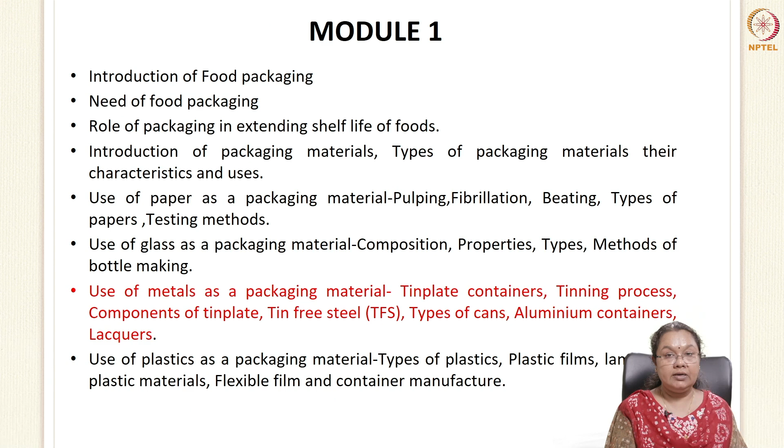Under this, we'll be discussing about tin plate containers, the tinning process, and the different components of tin plate, then tin-free steel, aluminum containers, different types of cans, and lacquers.

Coming to metal packages, these are very robust and durable. Because of this, they are used for canning and to store canned products, dairy products, drinks, and non-canned food products. They are used to develop metal closures, metallized films, laminates, and even in non-food products like paints, varnishes, lubricants, cosmetics, and other biological products and medicines.

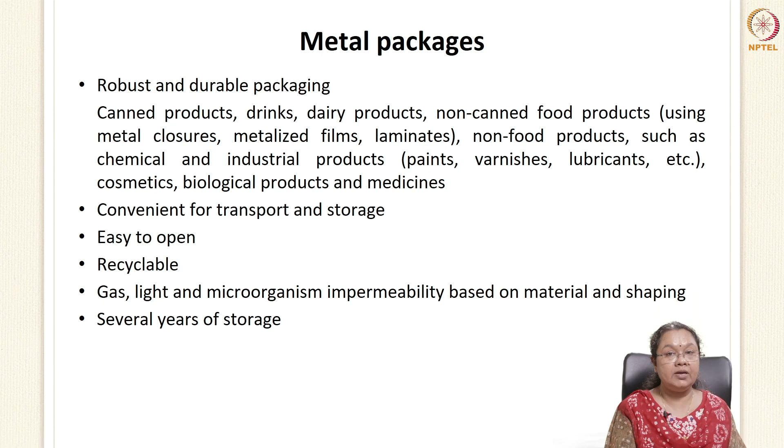The reason why we use metals as a packaging material is because it's easy to open, it is recyclable, it can be recycled and reused, it's convenient to transport and store, and it can be stored for a very long time. It has a very long storage life and is impermeable to gas, light, and microorganisms. But these parameters depend upon the kind of material used and the shape of the material.

We have tin plate, which is the older packaging material, and this can be in the form of round, square, or rectangular. The first tin cans were patented by Peter Durand in 1810, based on the experiments of Nicolas Appert, who developed the process of sterilization, later called appertization. Today also we follow the same term, sterilization or appertization. So the name was given based on the name of the scientist.

Tins are light in nature. Even from the consumer point of view, it is easy to handle and carry. It is much lighter, and it reduces carbon dioxide emission during transportation, so this is environmentally friendly also.

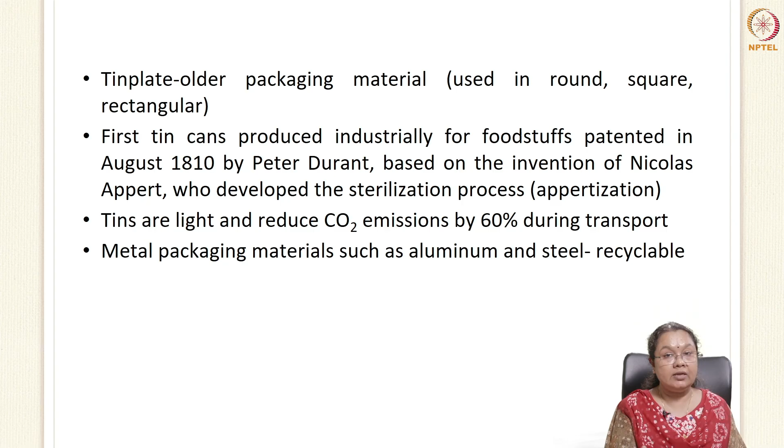Metal packaging materials generally contain aluminum and steel, and these are recyclable and reusable. Once it has been opened, it can be reused for other purposes also, not necessarily for storing food - it can be used for storing other things.

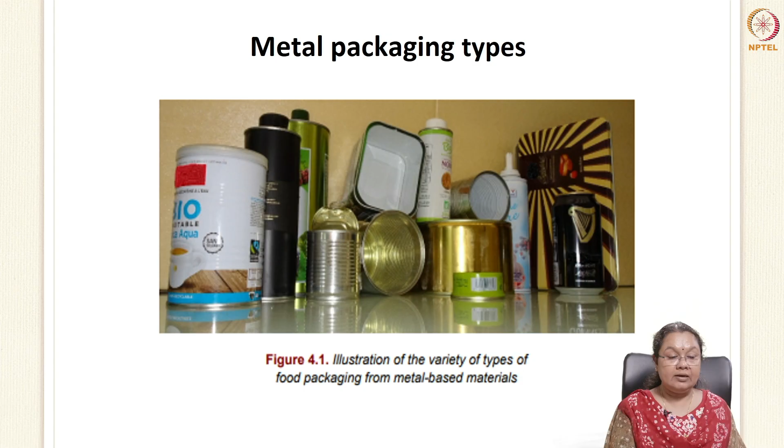In this picture you can see a variety of packaging materials shown here, and all these packaging materials are metal containers, and they can be cylindrical, rectangular. We also have boxes here.

Metal cans, mainly used in the food industry, are of two types: 2-piece can and 3-piece can. This generally contains one body, that is the cylinder part, and it may have one or two lids depending upon the type of can. If it is a 2-piece can, it will have one lid, and if it is a 3-piece can, then it will have two ends, that is one lid and the other bottom part.

These lids are seamed to the can, and inside this the contents are stored. Generally, because of the sturdy nature of the can, it doesn't need a secondary packaging. The number of secondary or tertiary packages can be brought down.

We also have beverage cans, which are lightweight. Though they are lightweight, they are unbreakable. They can resist the impact during transportation, they are puncture resistant, they can withstand very high temperature and pressure, and they are good barriers to light, gas, and oxygen. Mostly the cans used for packing beverages are 2-piece cans.

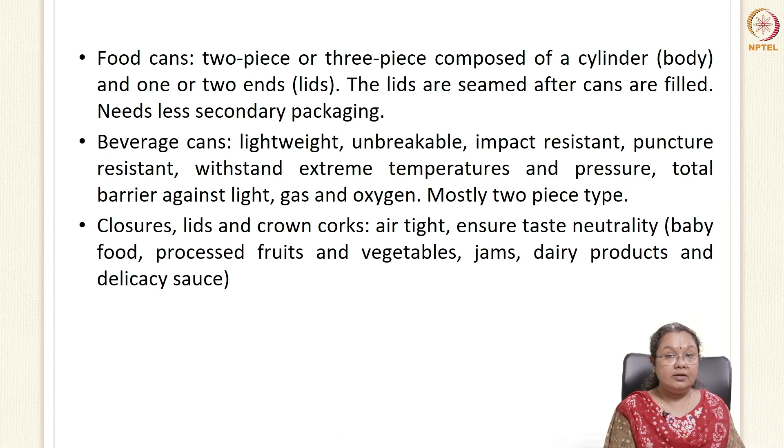The metals can also be used for developing closures, lids, crown corks. This helps in keeping the contents airtight, and also ensures neutral taste, which is very much important in baby foods or infant foods, processed fruits and vegetables, jams, dairy products, and other delicacies like sauces. So the contents from the tin or the container or the lid should not leach into the contents inside, and should not interfere with the flavor of the product.

We also have drums and pails. Drums and pails are large containers. These are generally 3-piece steel or stainless steel containers which are aseptically filled.

Then we have containers for aerosols. These can be 3-piece or 2-piece, and these are generally used for whipped creams.

Then we have trays and foils. They can be rigid, semi-rigid aluminum trays, made from aluminum rolls or aluminum alloys. Generally, the thickness of this aluminum sheet will range from 70 to 300 microns.

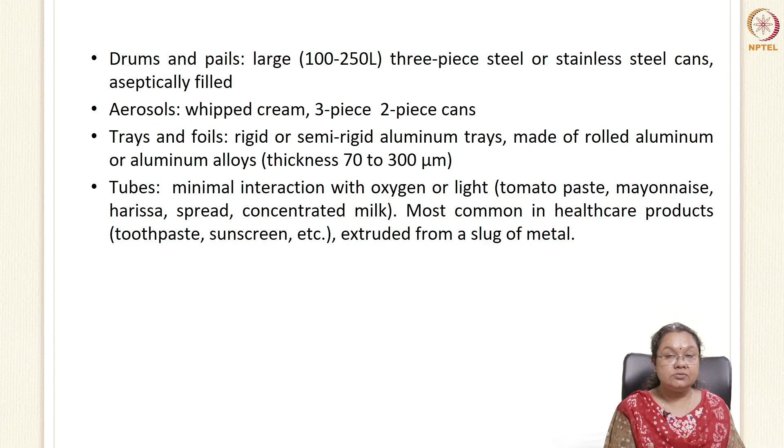Apart from this, we can also develop tubes using metals. These metal tubes are used to store tomato paste, mayonnaise, and concentrated milk spread. In food industry, we generally find these things stored in tubes. This is easy to use and easy to take the contents from, and these have minimum interaction with oxygen and light. You might be familiar with toothpaste, which is also a tube container and which is extruded from the metal.

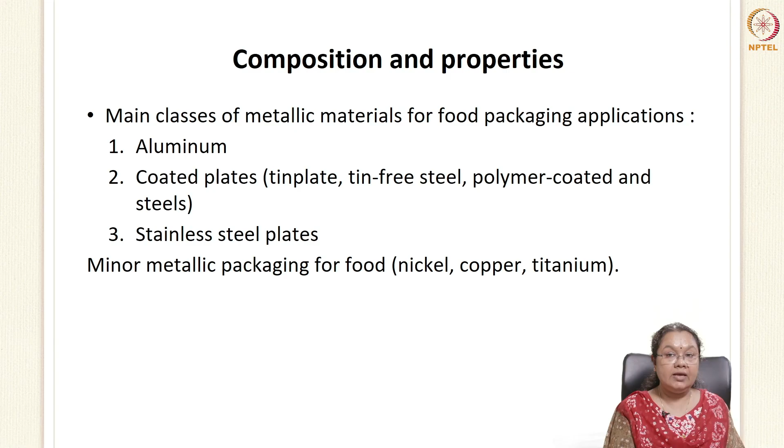Now coming to composition and properties. The packaging materials are divided into three different classes: aluminum, coated plates. Under this we have tin plate, tin free steel, polymer coated steels, and another class called stainless steel. We also have containers of minor elements like nickel, copper and titanium.

Now coming to steel based or tin plated steel material. Steel based is also called iron based material. Components of this will be tin, steel and chromium, which are used to develop the composite material or to form the tin plate. We can also form electrolytic chromium coated steel, denoted as ECCS. And since it does not contain any tin, it is called tin free steel, or TFS.

So we have the iron as base material onto which the chromium is coated directly. There is no tin layer in between, that's why it is called tin free steel. Iron is the bulk chemical or the major base material here.

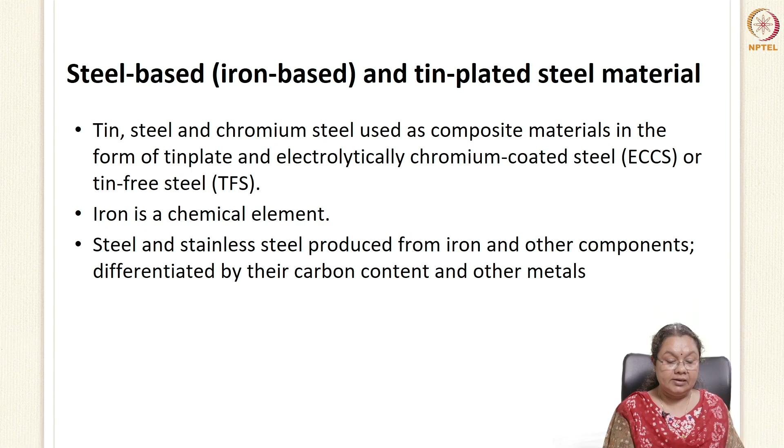Steel and stainless steel are produced from iron and other components. The composition of these components is different in these two things. Steel and stainless steel are not one and the same. The carbon content and the metal contents differ in each.

Iron ore, coal, lime and ferroalloys are needed to make steel. We also need aluminium, chromium, manganese, silicon, titanium, vanadium. These are other components that are added to improve the properties of the steel.

Steel can be made in two ways: by melting the contents in a blast furnace, or using an electric furnace. Generally, the electric furnace is used for recycling or recovered steel, which is melted using electric furnace. Generally, if we are going to use natural sources, we use a blast furnace.

In this, the iron ore and the coke are melted at very high temperature, and the carbon ranges between 0.03 to 2%, because carbon is a contributing factor for the strength. Similarly, phosphorus and nitrogen contribute to the stiffness of the container or material.

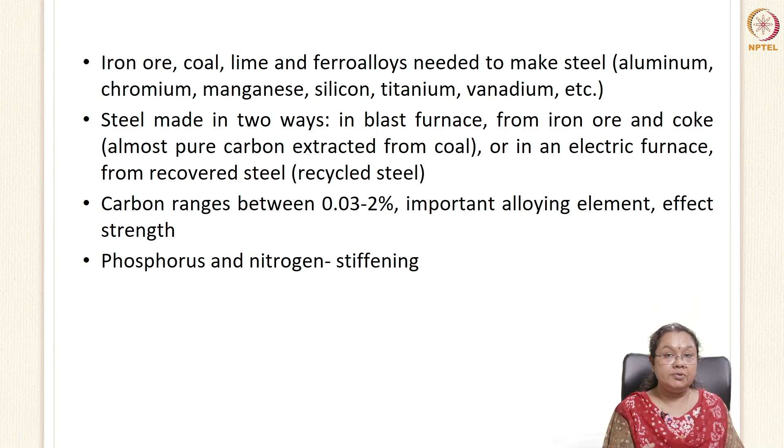Now there are four different types of steel. On the left side you can see L, D, N, MR, and their properties, applications, and composition are given here. L is highly pure and has very good resistance, highly resistant to corrosion, and these are generally used for packing acidic foods like pickles and other things.

Then we have D type of steel, that is non-aging steel, dedicated for severe drawing operations. And N stands for nitrogenized steel for higher rigidity. Such steels are used for developing drums and can ends.

Then we have MR steel. These are the most widely used tin plate, and used for packing meat and vegetable products. These are not too corrosive. Tin plate steel is also called low metalloid steel, where L stands for low metalloid. MR type has high amounts of carbon, aluminum, phosphorus and copper.

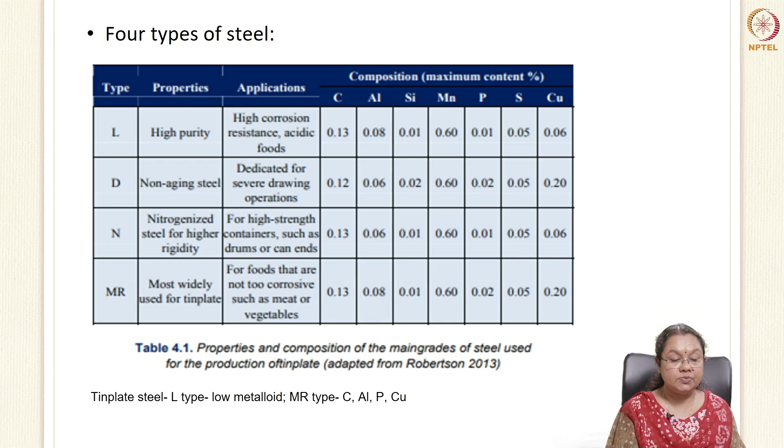Now tin plate steel is the main raw material used for developing cans and metal boxes. It is made of mild steel with carbon content below 0.08%, and it is coated with a layer of tin, and this coating is called tinning or tin plating.

This technique is called hot tinning, generally done by dipping the sheet into molten tin, giving a whitish gray color or dull matte appearance to the tin. This process is like a sandwich. This sandwich alloy of steel and tin has good hardness, high resistance to corrosion, and is a non-toxic alloy.

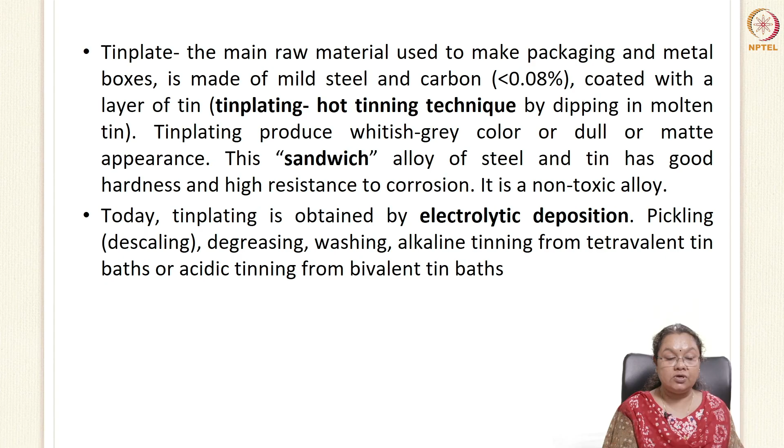Again, tin plating can be done by electrolytic deposition. This is another way of coating the tin, and generally includes pickling (descaling, removing unwanted parts and smoothening), degreasing, washing, alkaline tinning and acidic tinning.

Tin-free steel or ECCS, electrolytic chromium oxide coated steel, does not contain tin. Instead, it is coated with chromium, in the same way electrolytic tin coating is given. So it can also be called chromed iron, written as ECCS.

It contains chromium oxide with a thickness of less than 1 micron, and the process is similar to electrolytic tinning. The requirements for ECCS, that is single or double cold reduced electrolytic chromium oxide coated steel, are given in ISO 11950, with specifications for both sheets and coils.

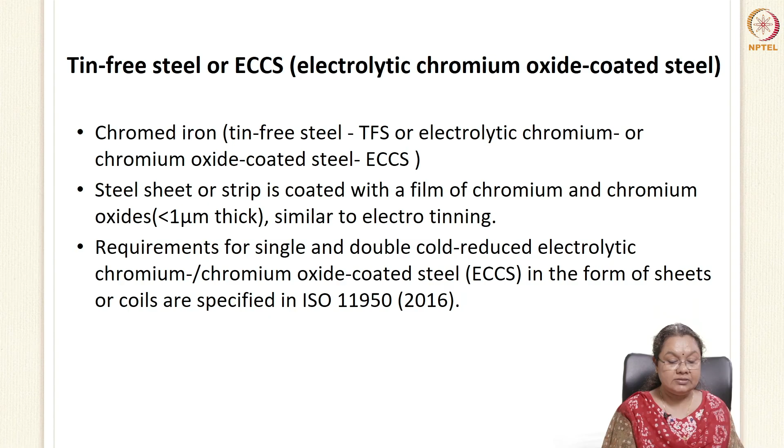If you look at the figure here, it shows a multi-layered structure of tin plate and tin-free steel. You can see the thickness of the base material can range between 100 to 350 microns. Over the base material, a tin coating is given, which is not present in tin-free steel. There's a tin coating or tin alloy put down, over which there's free tin with a thickness of 1.35 microns, and over this the passivation layer is put.

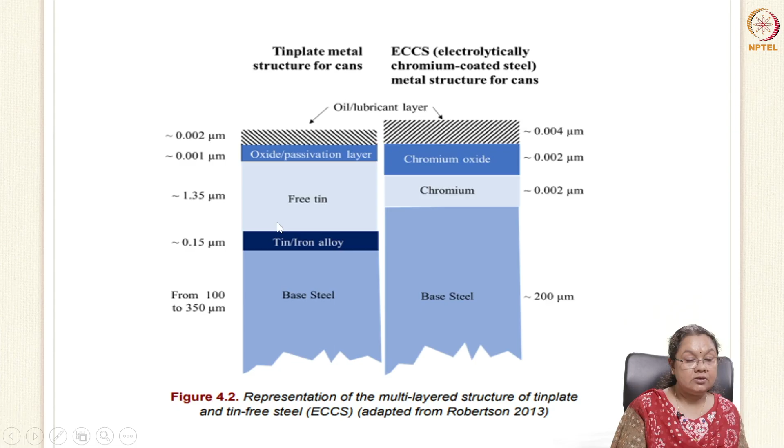In case of ECCS or chromium-coated tin-free steel, you will not find tin. Instead, the thickness of the base steel will be much higher. We have a chromium or chromium oxide layer over which an oil layer is given. The passivation layer is a metal layer that helps prevent corrosion, generally done by treating the surface with nitric or citric acid. This elongates or prolongs the shelf life of the metal container or sheet.

Then we have stainless steel, which is used for food packaging, also denoted as SS. It is inert and non-corrosive, and it is the reactive chromium which forms a passive coating that creates a barrier to corrosion, with chromium percentage around 10.5%, which also enhances the durability of the product. Stainless steels are generally heat resistant, have a hard surface, are clean, reusable, and have good finishing.

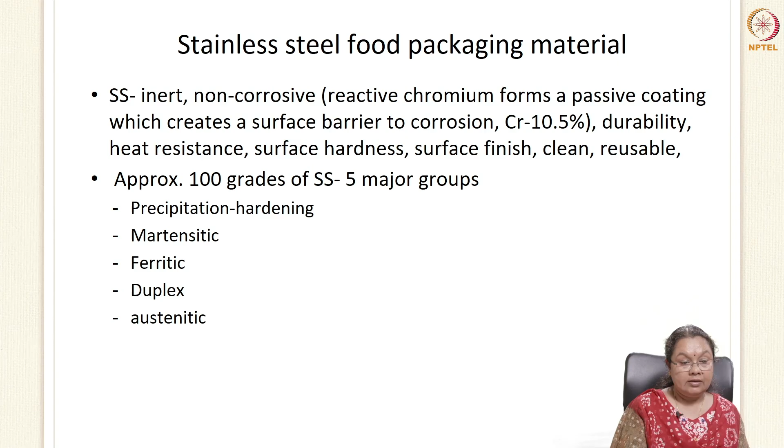Generally 100 grades of stainless steel have been recognized and reported, but they are classified into 5 major groups: precipitation hardening, martensitic, ferritic, duplex, and austenitic. These are the different groups of stainless steel.

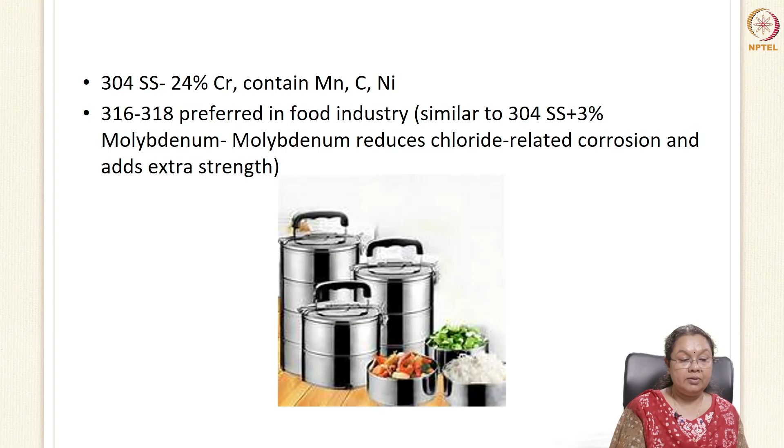Now you will be familiar with 304 stainless steel and 316 or 318 stainless steel. Usually we use 316 or 318 stainless steel in the food industry. The parameters or properties are almost similar to 304 stainless steel, but it also contains 3% molybdenum, which reduces chloride-related corrosion and adds extra strength to the container. 304 stainless steel is generally used to develop grills and other fabrications, and it contains manganese, carbon and nickel along with chromium, having 24% chromium.

Then we have aluminum-based material. Aluminum is the third most abundant element on the surface of Earth, used to develop lighter, thinner, ductile materials, but aluminum cannot be welded. Coors company was the pioneer to use aluminum cans, starting in 1959, and thereafter it was continuously used for the production of soda, energy drinks, sparkling waters, and other beverages. It has become the most sustainable beverage packaging material, mainly promoted because of its recyclable property.

It can be used in different forms like bins, bottle caps, soft packages for liquids. It can also be used for bulk packaging, capsules, bottle stops, medication tablets, blister packaging, etc.

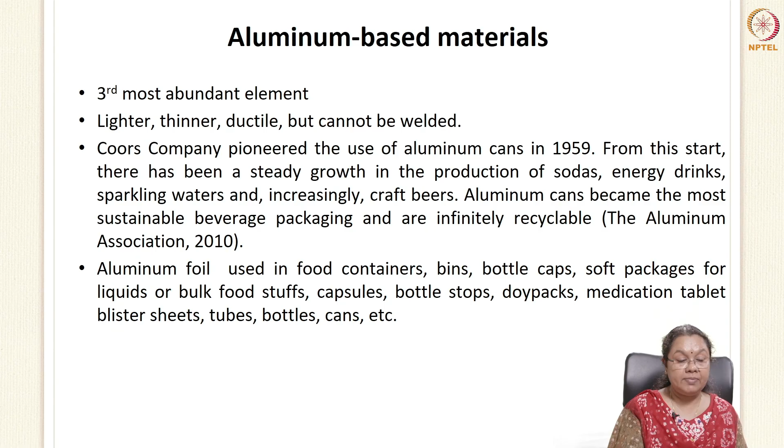Usage of aluminum is still promoted because of its light nature, and when we go for light nature, we have to use purest aluminum. We can also use magnesium or manganese as an additive, but this will improve the resistance of the packaging material.

Aluminum oxide, which is extracted from bauxite, requires very high energy for extraction. Primary aluminum and recycled and purified to liquid metal, filtered using a ceramic filter, and cast into ingots. Ingots are the molds where the aluminum is poured and stored. From these ingots, the material is converted to sheets. Any imperfections on the surface of the ingots can be removed by polishing, and then these are developed into sheets which can be cooled and used later.

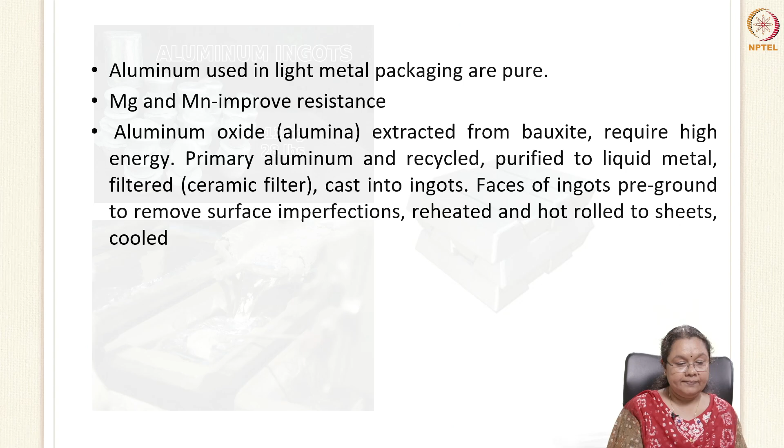In this picture you can see different types of ingots. The first one is an ingot developed at home. In the commercial way, it is done in a mold like this. On a commercial scale, the ingots are put in casts like this, then developed into blocks and stored for a later period. These ingots are made into sheets to be developed as containers or other purposes.

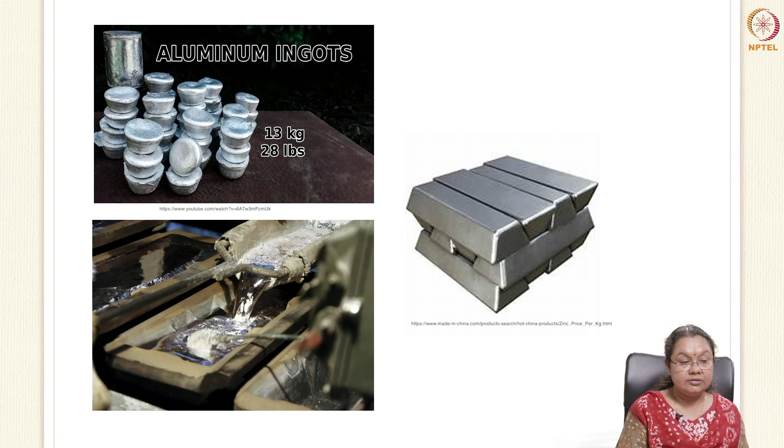Now these are the applications of aluminum, and along with this you can also find the properties and compositions. Aluminums can be converted to foils or flexible tubings, and they are given the number 1050. This is how flexible tubes and foils are designated, belonging to the 1XXX series. Then we have beverage cans, a 3-piece can with number 3104.

Then 2-piece cans are numbered 5042. Likewise we have others like foils for lamination, 8079, belonging to the 8XXX series. If you see the beverage can, it does not contain chromium but has high amounts of manganese. Whereas easy-open beverages or 2-piece cans have all the ingredients. But foils for laminations do not contain manganese, magnesium, chromium, or titanium.

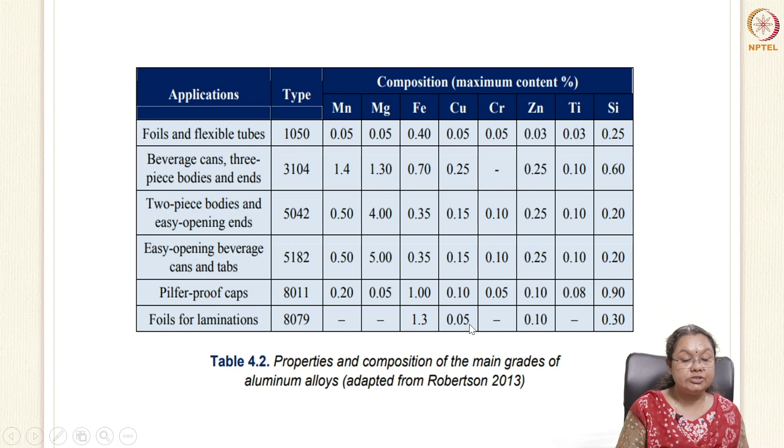The 1XXX series are commercially pure aluminum, unalloyed, with iron or silicon as common impurities, used for developing aluminum foils or extruded containers. We also have aluminum cans or containers with high amounts of manganese, and then 5XXX series which has 4 to 5% magnesium and 0.5% manganese, used to develop rigid containers, especially cans. Then the 8XXX series have wider applications and a wider range of composition.

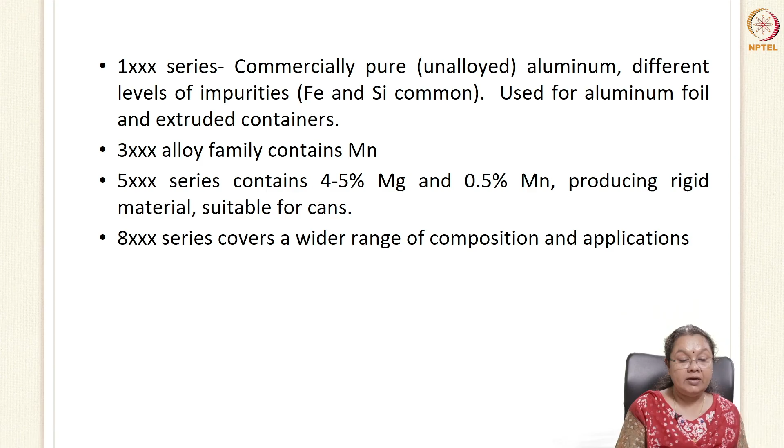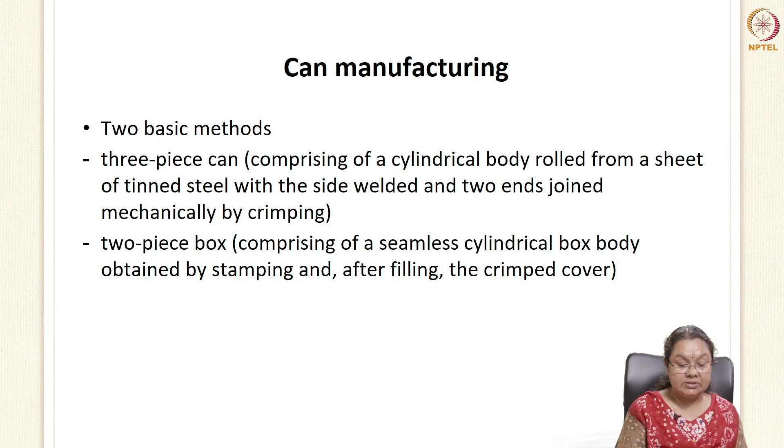Can manufacturing has 2 types: 3-piece can and 2-piece can. In the 3-piece can, there's a cylinder body rolled from a sheet of tinned steel welded on the sides, and the 2 ends are joined mechanically by crimping. In the 2-piece can, the cylindrical body is stamped, so it's seamless and easy to open. So 2-piece cans are very common now. 3-piece cans were earlier used to can meat products, but now they have been replaced with 2-piece cans.

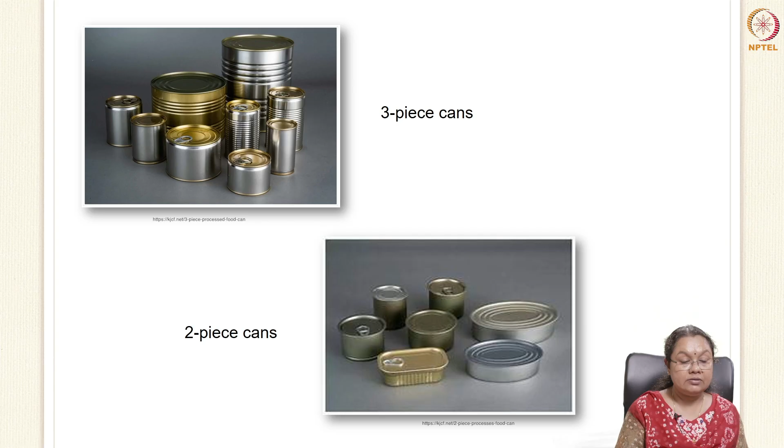On the above figure, you can see 3-piece cans. They come in different shapes and sizes. And 2-piece cans can be rectangular or cylindrical, and they have a lid on the top. The bottom part is part of the body itself.

Now let's see how the 3-piece can is manufactured. It consists of a cylindrical body rolled from a piece of flat metal with a longitudinal weld joint, usually done by welding or soldering, together with 2 can ends which are seamed onto each end of the body. Usually these are made from tin plate. Now let's see the processes one by one.

We have thin metal strips. These are cut into desired sizes, and then lacquered. Coating is given on the surface to prevent corrosion, and then these are dried. Usually the lacquering is given on the internal side, and after drying, these are cut into the size of the containers, then rolled into cylinders, and both edges are kept together and welded or soldered. Then lacquering is applied on the sides again, because during rolling or welding, sometimes the lacquer may be removed, so to overcome that we lacquer it once more, then it is cured.

It is passed into the flanger, and the edges are bent, and here the seaming is done, and the lids are fixed on these flanges. Again, the stiffness is enhanced by beading, and then it is palletized, to see how much force it can tolerate when transported and stacked.

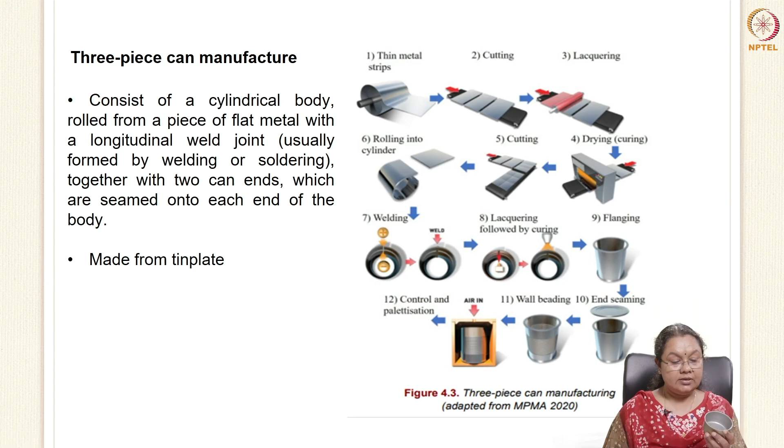Now let's look into this demonstration. This is a two-piece container. Here you see there's no seam on the edges, so the end is part of the body itself. This is called the body, and this is the flange, bent over on the edges, over which the lid is placed. This is a two-piece container because after seaming, you just pull it off and the lid comes out. So this is a two-piece can, whereas in the three-piece can, you will have a separate bottom.

The bottom will also be separate, and it is also seamed here, and then the contents are filled. Inside this, lacquer is given - a coating on the surface, which we'll discuss in the coming session. Lacquer protects the contents from interacting with the container or the metals. If it reacts with the metal, it may contaminate the product or interact with the components of the content. So to prevent that, we apply lacquer.

Just imagine this is a metal sheet, and if you roll it, make it into a cylinder form - so this will be the cylinder. First step in can making is to form the cylinder like this, and both edges are welded together. We don't add adhesive or apply any material here, because this can comes in direct contact with the food, and nothing should leach into the product. So welding or soldering is done - it's just crimping here, like stapling the thing.

Then the sheet is passed into the flanging machine, where the flanges are developed - just a bending on the edges where the lids will come and fit. So this is how the can is developed in three-piece. Now let's see the steps. There are 12 steps in three-piece can development.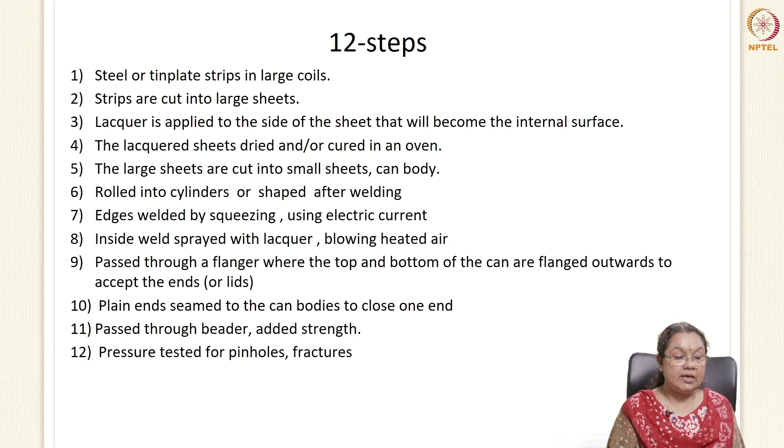There are three-piece cans and two-piece cans. Three-piece cans can be developed using these 12 steps, and two-piece cans we'll be discussing in the coming session. So let's wind up for today. Thank you.